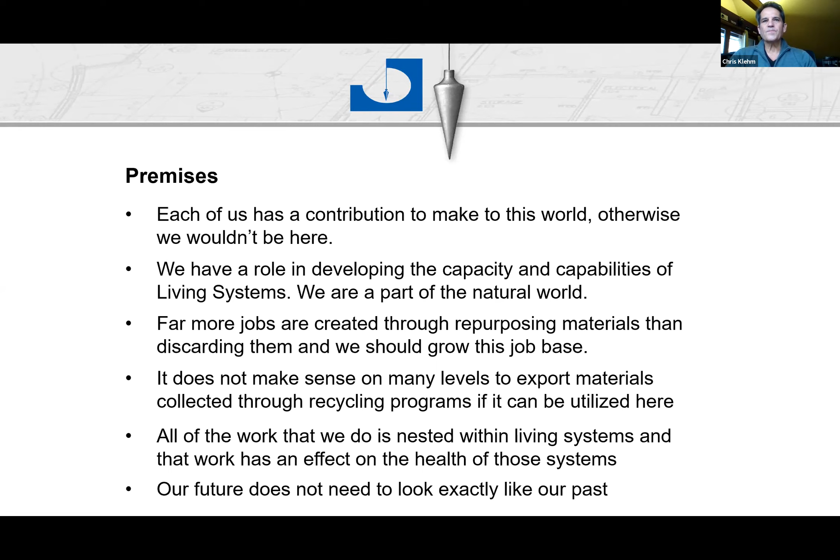Hello, I'm an outdoors person. Anybody that knows me knows I primarily spend my time outdoors - fly fishing, farming, hiking, camping, swimming, or doing work outside. I feel very connected to the land, especially the land that I live on and work. That connection has formed a great love, respect, and appreciation of the natural world.

My travels have taken me to beautiful and fragile places all over the world, mostly in pursuit of fly fishing, I have to admit. But I've seen firsthand how ecosystems work and the interdependence they have that makes up the workings of our natural world.

Lately, when I go to some of my favorite saltwater flats, I'm met with overwhelming amounts of debris, especially plastic debris. This debris has been blown there, dropped off a ship, or just not dealt with properly. When you really start to think about it, it's not having the will to address your responsibility for the waste that we create. We have this term that we throw things away - but where's away? Sometimes it's just due to not having an awareness as to the impact of what we have, because it seems to be so small, an innocent action or an inaction.

But let's look at the ways that we can begin to see paths to develop awareness and address this impact.

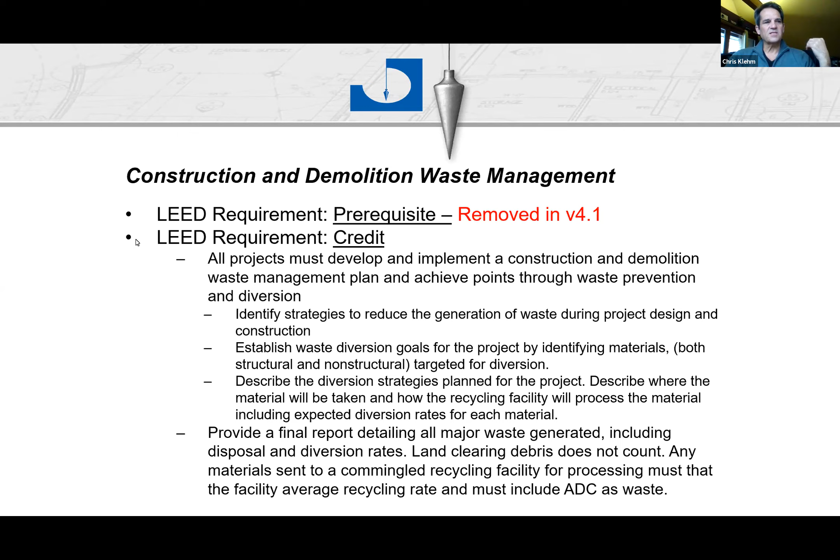So they've revised this credit now in v4.1, and that credit is we can get one point for diverting 50% of our waste. Or LEED is now focusing much more on waste prevention - what are ways that we can actually reduce the waste?

There are salvaging strategies. In the demolition phase, can we leave more in place? So now we're looking at how do we reduce the amount of waste.

There are two ways to get points here. One is, instead of taking 50% of the waste we generate and diverting it from the landfill, can we actually generate less waste - generating less than 15 pounds per square foot, or generating less than 10 pounds per square foot? And LEED allows an exemplary performance credit now: if we use a third-party verified commingled facility and reduce the waste down to 7.5 pounds per square foot, LEED will reward us an extra point for that.

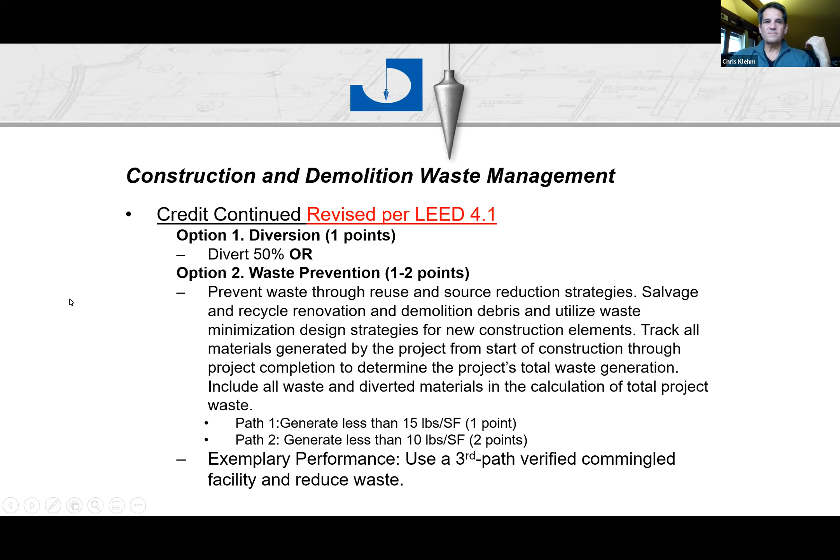So what's our responsibilities as contractors? In estimating, we need to account for how we're going to create a plan. What materials are we going to generate in demolition, and how are we going to address those, as well as those generated during construction. So from the outset, in the estimating phase, we need to think about how we're going to deal with this.

We're going to spend additional time during demolition, deconstruction. Is there going to be space on site for dumpsters? Are we going to have to address waste in ways that it's going to take it far off the site? Do we have to truck it somewhere far rather than locally? Can we donate to Construction Junction? Can we recycle the doors, calling somebody like Andrew Ellsworth?

In project management, we take and we detail that waste management plan even further. We look at how various waste streams are going to be tracked. Are we going to have separate dumpsters? Do we have enough room for this? Or do we have to commingle everything? But we begin to think about packaging. How are we going to buy things that we end up with much less packaging?

Locating the dumpsters is part of the site logistics plan. How are we going to get the reports? Are we only going to have one hauler, or are we going to have a variety of haulers?

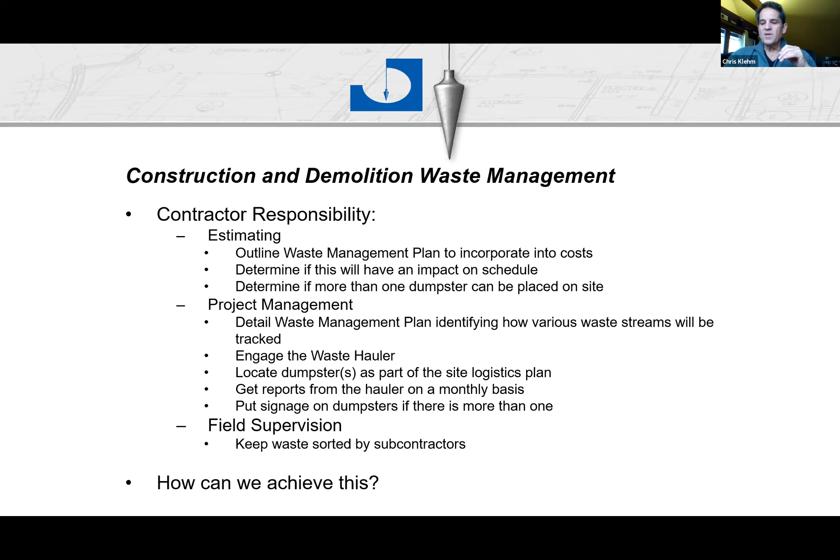And then in the field supervision, we have to look at signage on the dumpsters if we have more than one. And then making sure that the subcontractors are going to stay on top of this. So how are we going to achieve this?

Reduce, reuse, recycle. Starting there. Can we reuse it? Can we reduce it, then recycle it? So in recycling, really look at what we have in the waste management plan. Know the designated areas for recycling. Don't start with that 50% rate. Start with 100% diversion rate. Can you hit 100%? I've hit 98.7% is the best I've done on a project, but we went for 100%.

And don't look at it as trash. These are resources. This is material that can be reused, can be recycled. This could be feedstock for new material. Is there leftover building supplies? Can we reuse those? Can we donate those to somebody like Construction Junction? When we're doing temporary structures, what are ways that we can do these so that they can be disassembled and reused? Can we start to create modular construction for temporary structures or for forming that can be used over and over again?

Minimize the amount of paper drawings used at job sites. Everybody has iPads now. We can get those out into the field. And then avoiding contamination of the bins. We think about the perspective of the hauler. What is the best way we can give them that material so they can recycle more of it?

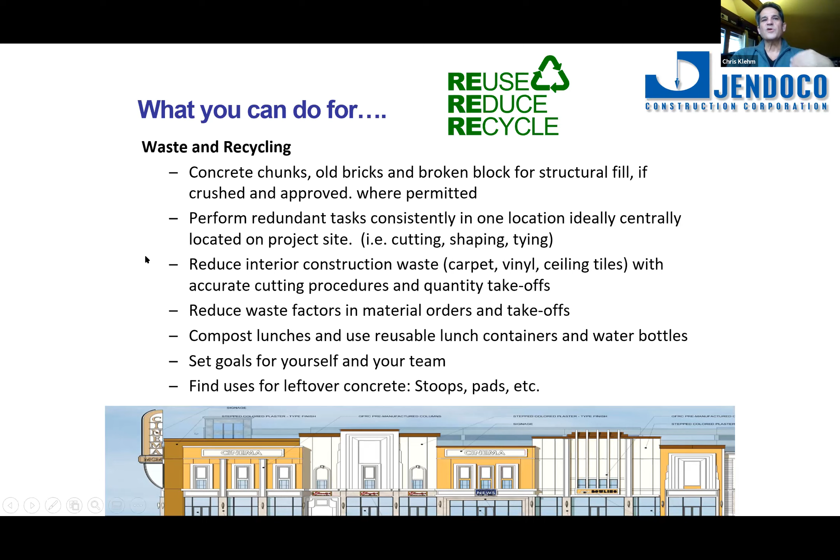So we go back to that reduce, reuse, recycle. Now, that's the foundation of waste management. So let's start to think about waste in terms of why is it bad. And we think, what's the first thing we can attack? Well, what are the materials that we're throwing away that have large amounts of embodied carbon in there? It takes a lot of carbon created during the fabrication process.

Cement is one of them. The manufacturing of Portland cement is the third greatest generation of carbon dioxide that we have. So if we reduce steel or reduce the amount of cement that we use in concrete, we're reducing that carbon. Reducing the amount of steel, wood versus steel. Wood is a renewable resource and actually sequesters carbon. Reduce the amount of items that we're importing.

If we're buying materials local, we're supporting a local economy, plus we're not getting into all those transportation costs and the carbon that we generate in trying to get materials to the project site.

Reduce the amount of waste that's generated through packaging. Can we start to minimize packaging? We did a project where all of the casework was delivered not in cartons, but in furniture blankets. Nothing was damaged. There was no packaging there.

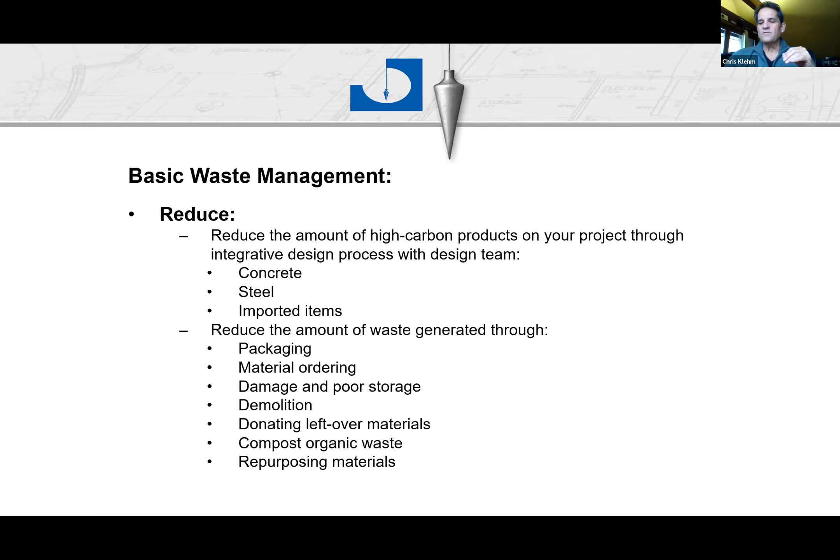Reuse. What are salvage opportunities? We salvage buildings in whole, and only take out the parts that are damaged. What are ways that we can improve the materials on site so they can be reused? How can those materials be used in a way that we hadn't thought of before? Reusing materials as a whole, upcycling them, and going out and purchasing reused materials.

Hear more about that a little later. How do we purchase reused materials? Next slide.

Separate materials as your feedstocks. Don't think about them as waste. With metal studs, get all those metal studs in the bins off the floor, so all that metal goes into a container. Again, I'm going to stress this again: separating that organic and wet materials. Make it easier to recycle than it is to throw away through bin placement, setting things up so it's more difficult to throw something away than it is to recycle it.

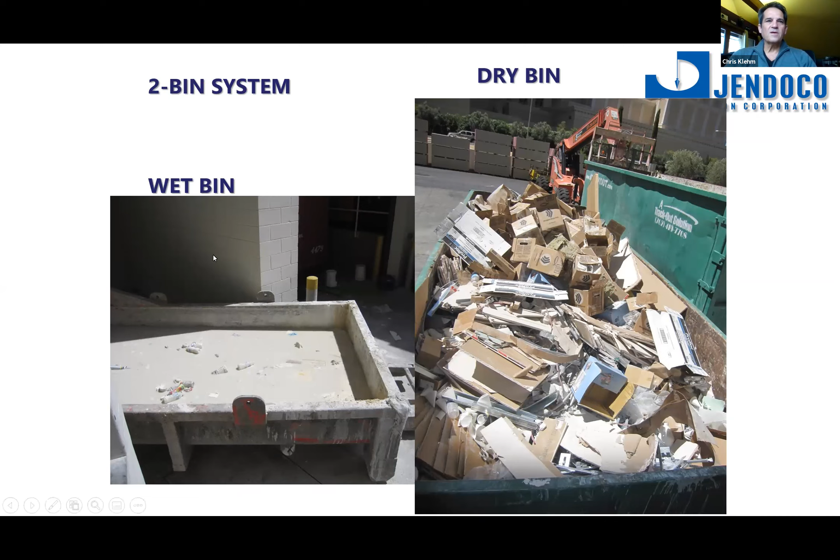Wet bin, next slide. Wet bin can be used for paints, drywall bucket cleanouts, sodas, drinks, water, oils. The dry bin's basically everything else. This way, we're not contaminating any of that material.

Food containers, put the food containers near where the lunchrooms are, or if you have a multi-story building where people eat lunch on each floor, put it in those lunch areas. An optional third bin is strictly for concrete cleanout. The concrete can dry up and then be crushed and recycled. So having a concrete cleanout bin is a great way to really reduce the amount of waste that we have.

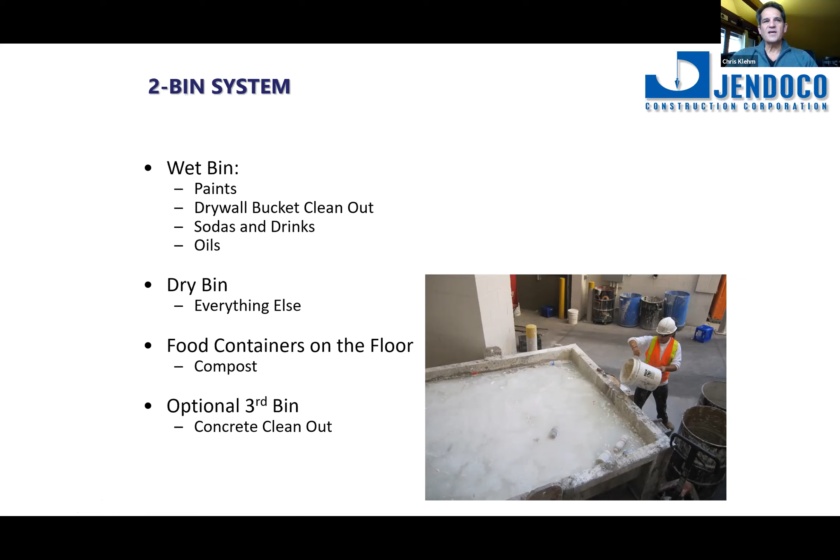Next slide. Best practices. A lot of us do design build work or negotiated work. Work with a design team for disassembly. What is the secondary use this building could have? Think about that, how can it be flexible? Particularly in interiors, how can we make interiors much, much more flexible?

Set those high targets for the project. Before you start demolition, what are ways that you can salvage and reuse materials? If you're taking off an addition, are there joists that can be reincorporated back into that project? Build time into the schedule for deconstruction.

Just as we get owners to purchase long lead time materials, think about deconstruction as a long lead time process, and let's get in there and get that process started as soon as possible. Work with your waste haulers.

Make sure you're doing everything you can to make their job easier and more effective. Salvage all those surplus materials. Look at ways you can reduce packaging on projects by accurately purchasing materials you need, doing on-site mixed concrete rather than trucked-in concrete. If you need 5.3 yards for a pour, they'll mix and pour 5.3 yards. You're only paying for 5.3 yards, not for concrete you're throwing away. The costs are competitive, and we're not creating waste.

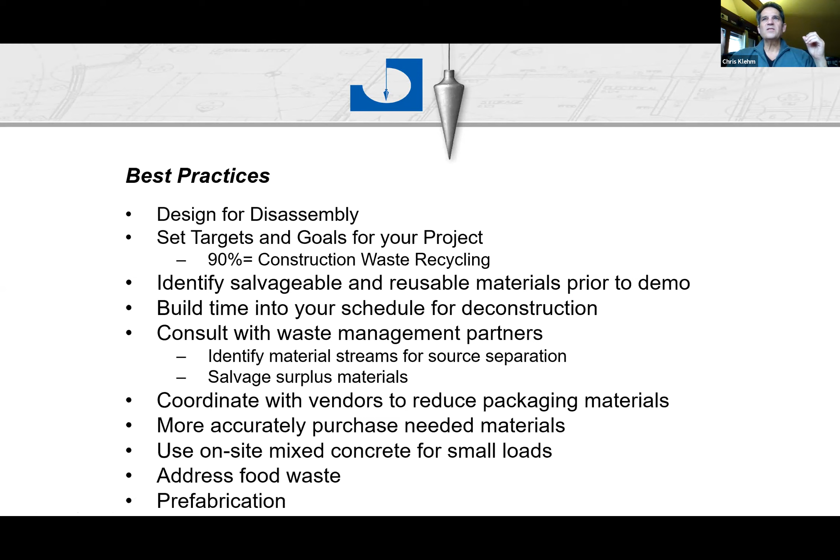Addressing food waste, prefabrication - we did the whole Tree Pittsburgh project as a modular building, and that reduced waste significantly on that project.

Landfills have huge impacts. 70% of the waste in landfills is construction and demolition waste. 25% is just from commercial interiors, which can be designed for all kinds of flexibility so we're not throwing things away. So we can have a huge impact.

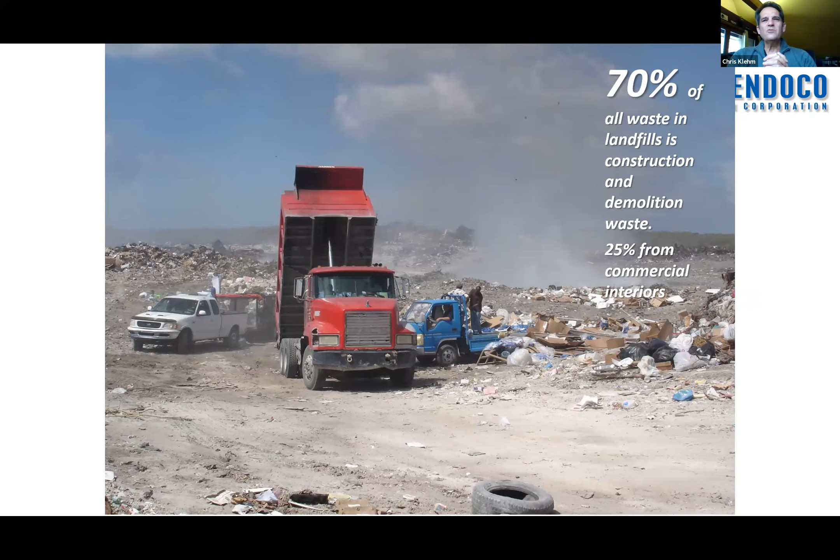Surface pollution isn't the only environmental impact - carbon emissions are another one. We release a lot more carbon when we extract and manufacture materials for construction than we do when we salvage buildings or materials and recycle them. We spend a lot more carbon on materials than we do in operations. 80% of the carbon in a building is embodied carbon from the extraction, manufacturing, and transportation of these materials.

Reducing the amount of each of these has a direct environmental impact - the less carbon we use, the less impact on climate we're going to have. We're also starting to look at the climate impacts of materials. Wood is a carbon sequestering material, while steel takes a lot of carbon and releases a lot of carbon into the atmosphere to manufacture. So wood studs versus metal studs - they're doing high-rise buildings now out of wood in a structural way. We need to understand that and work with our design teams to help bring down the environmental impact.

The impacts that waste has are varied and significant. Land excavated for waste disposal reduces tree cover for carbon sequestration. Methane released from landfills, unless captured and used on site, is released into the atmosphere. Transportation of construction waste means exhaust from trucks. We're essentially landfilling feedstock that could be used for manufacturing new materials, reducing the amount of carbon we have, and materials that could be repurposed in projects, helping other people buy them less expensively.

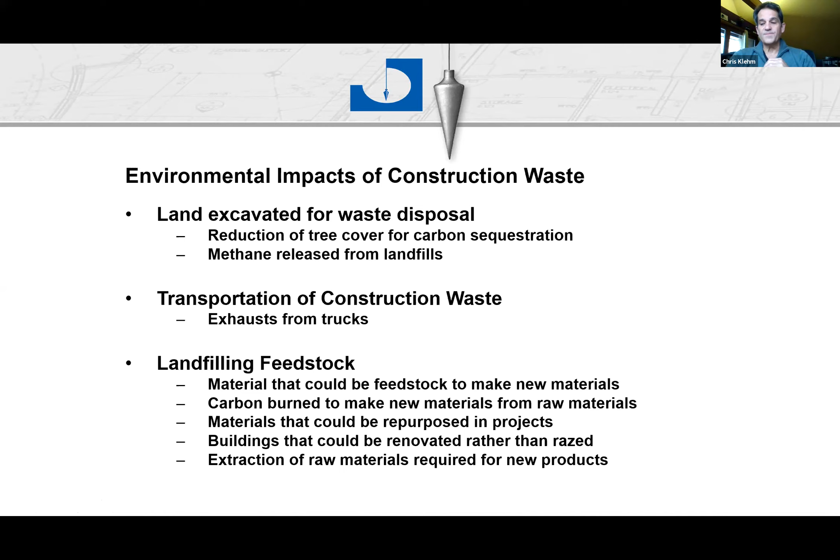When the USGBC surveyed people on what they mostly related to environmentally, only 11% associated green space with green building, with living a longer, happier, healthier life. Recycling was huge - that was one of the most related ways people looked at green buildings.

We've been guilty of thinking there's a technological solution to every perceived natural problem. We couldn't be more wrong. We know that life begets life; technology doesn't. So we need to align with and enhance existing natural systems to heal that damage we've done and let nature work again. Reducing carbon is a huge part of that.

So what's in the works? For drywall, which really began this whole conversation on waste management, there's a company far away in Denver, PA, but they will come and pick up your drywall and recycle it. Two companies we're going to hear about real soon are Construction Junction, with Mike Gable - it's a source of used building materials and a great place to send your excess building material.

Doors Unhinged, with Andrew Ellsworth - Andrew's created an amazing resource for quality commercial doors and hardware. He will take your doors off your site, and he will sell you doors. This way we're not cutting down new trees for doors, not having new aluminum and glass for doors. Andrew can solve that - we're going to hear more about Andrew on that.

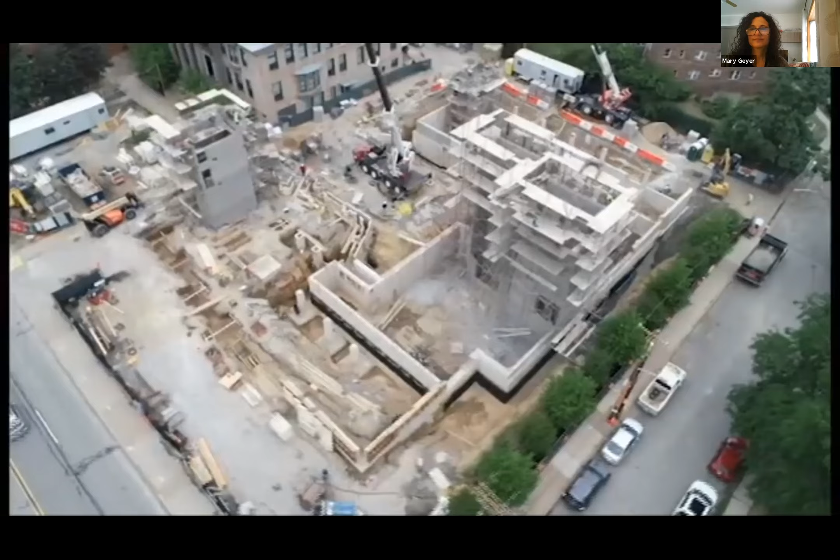Good morning, Pittsburgh Builders. This is Nathaniel Green on site at Carnegie Mellon University's Fifth and Clyde Residence Hall. This is a roughly 100,000 square foot project designed by LTO Architects out of New York City. Our local architect of record is PWWG. We're seeking LEED Gold certification for this project.

We have some lofty goals for recycling content. Under 4.0, we are expected to hit a 75% diversion rate. One of the strategies we've implemented is to segregate our food waste. Food waste is one of the biggest contaminators in a construction load. By implementing a separate 3-yard dumpster on site, we've been able to increase our yield of construction commingled loads by roughly 12 to 15%, which puts us solidly within our target goals for LEED 4.0.

The idea behind this is that contaminated loads - open coffee cups, drinks, spilling, food waste from lunch - gets on recycled content, and it doesn't get accepted at the recycling facility. So by keeping these in a separate container, we're able to increase our yield and have a better outcome for the project.

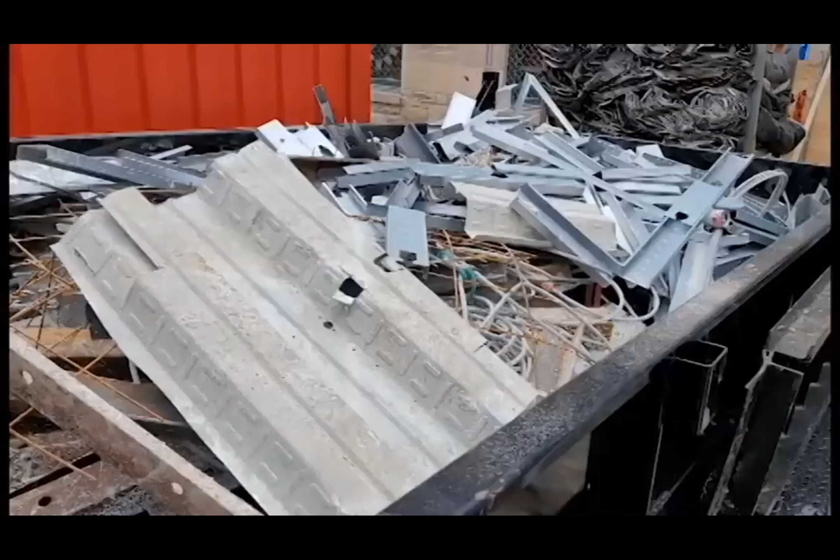Another thing we were able to do - this is ground-up construction, so we didn't have a lot of waste early on in the project. We were able to recycle our site lighting and re-implement that into the landscaping plan. We've also been able to scrap a good amount of metal, and we use the funds from the scrap metal to keep employee morale up and get subcontractor buy-in to our food waste diversion plan.

So by buying lunch periodically, we're able to keep guys happy and people are recycling more, which is great for the project. Thanks for your time and good luck on your projects.

Thanks for the great video, Nate and Mary. That was a great talk.

Next up, I'm really excited to hear from Eamon and 3R Sustainability. They're a LEED reviewer, and so those of us as contractors make our submissions. The documentation is a big part of what we contribute to the project. Now we're going to hear about how we can do the documentation better. So thanks for talking today, Eamon.

Great, thank you so much for having me. It's really nice to talk to everybody. I've worked with a lot of you folks in the last decade and a half in Pittsburgh, so I appreciate the opportunity to get to talk to everyone.

So 3R is a consultant in the Strip District. We're right above Wigle Whiskey - if anyone's familiar with the Strip District, we're on the 3rd floor. We are a LEED project reviewer, so there's about a dozen of us. We spend about half our time actually reviewing, on average, probably 500 to 600 LEED projects internationally throughout the year. So when they say the third-party review, we are one of about 7 teams that do that third-party review. So there's a good chance that we've reviewed your project.

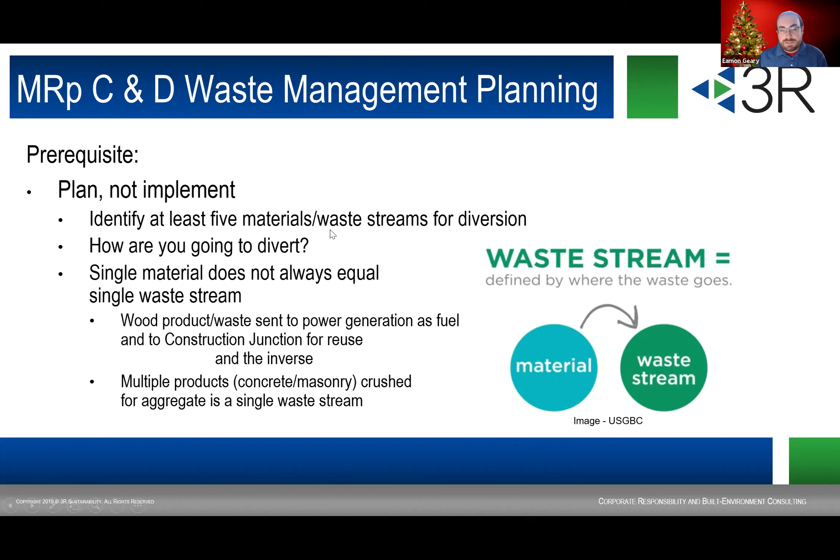I wanted to pull together some tips—these are the do's and don'ts. I'll leave them on the screen and look at my notes, because it's easier for me to write stuff like this down when we're getting technical. So what we're looking for in these credits is to make sure you don't have any inappropriate materials.

That's going to be hazardous waste, excavated soils, land clearing debris. I know we talked about alternative daily cover—those all need to be noted in your plan but kept out of your calculations. We want to see that you're looking at them and acknowledging them and diverting them or treating them as they should be, but keeping them out of your actual calculations, because you can't recycle hazardous materials—you can only remediate stuff like that.

The other item is not having 5 streams. I know it sounds silly since it's one of the requirements, but a lot of projects get pended mostly because they just don't have 5 streams. Another thing I didn't know, but now that I think about it—when you have commingled materials, that only counts as one waste stream because everything is together. So you can have 100 different products all commingled, and that only counts as one waste stream.

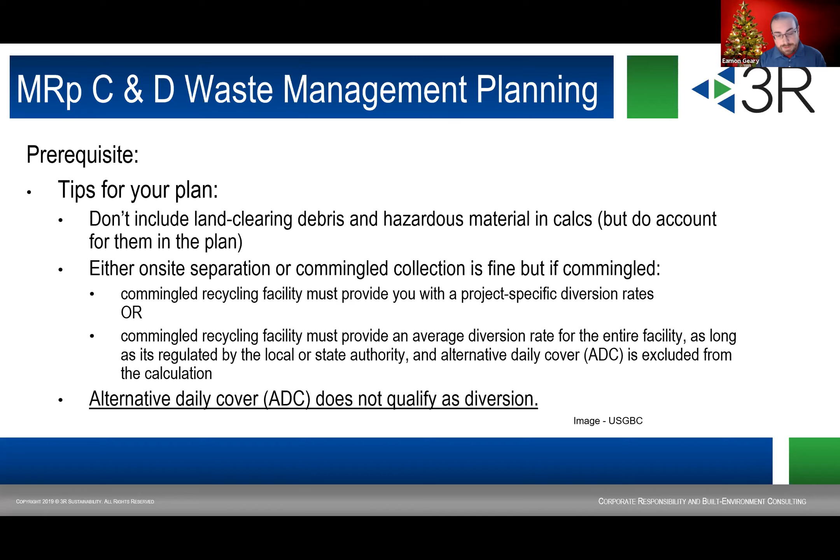The other item we see a lot is donations. So Andrew's great organization that he does with the doors—that's a donation, and you need to evaluate and track that as well.

Getting into the actual credit, option 1 has, here's the funny part. With 4.1, in some ways they made it easier, in some ways they made it more difficult. In version 4, option 1 can give you up to 2 points.

If you do 50% with 3 streams, you get a point. If you do 75% with 4 streams, you get 2 points. In version 4.1, there's only 1 point allowed for this option.

When you look at version 4.1, any project can take these substitutions, but you need to think, is this best for my project? In some cases, especially in the building materials and EPD and BPDO credits, it's an easy substitution, they're just requiring less materials. For this one, you do want to think, is option 1 best for my project, and if so, do I want to get that extra point?

So we stick with version 4. But option 2 is absolutely better in terms of version 4.1. It went from needing to reduce your total waste material to 2.5 pounds per square foot of building floor area, which is very, very difficult. I just looked at my count yesterday, and I was at 150 projects reviewed this year, and I haven't seen that once. That's almost an impossible threshold to hit. It was pie in the sky, I think.

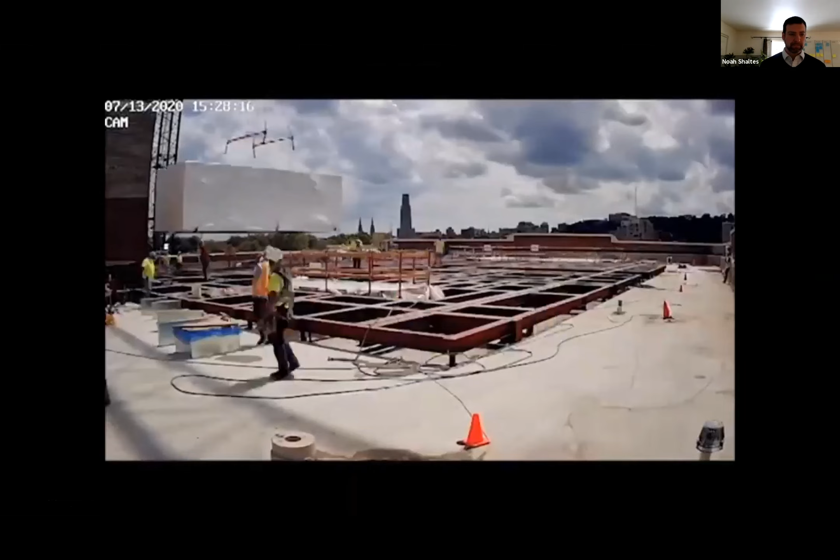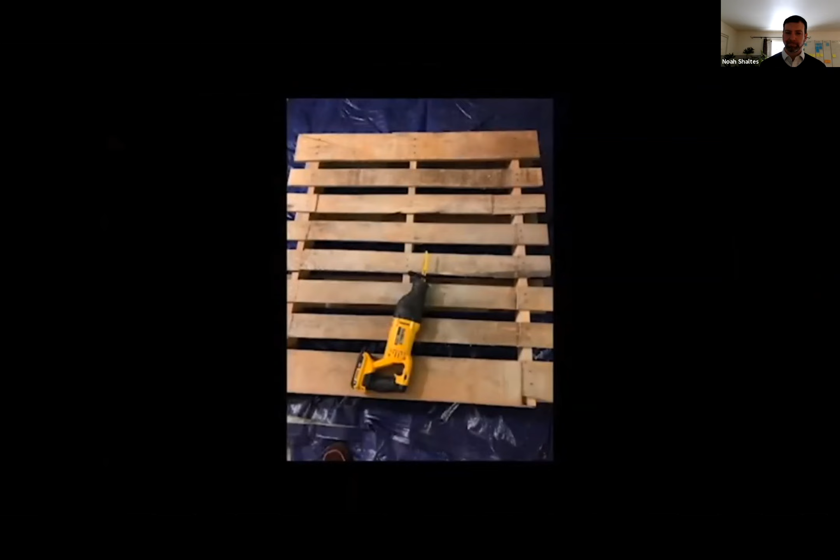Here in Pittsburgh at the 5051 Centre Avenue project, the Turner team utilized a prefabricated penthouse to reduce the amount of construction waste it would have taken to construct the penthouse on site. The masonry contractor on the project is reusing the wood pallets that other contractors have left behind after bringing their materials to site. This has reduced the amount of pallets thrown into the dumpsters. Even our own Turner employees have turned to making crafts from the unsalvageable pallets.

At the University of Pittsburgh BST3 project, the Turner team has salvaged office furniture and worked with local companies such as Construction Junction to provide a new use for the reclaimed items.

At MSA, the Turner team has made a team effort to recycle their own personal items, from water bottles to utensils, and take them to the local recycling center.

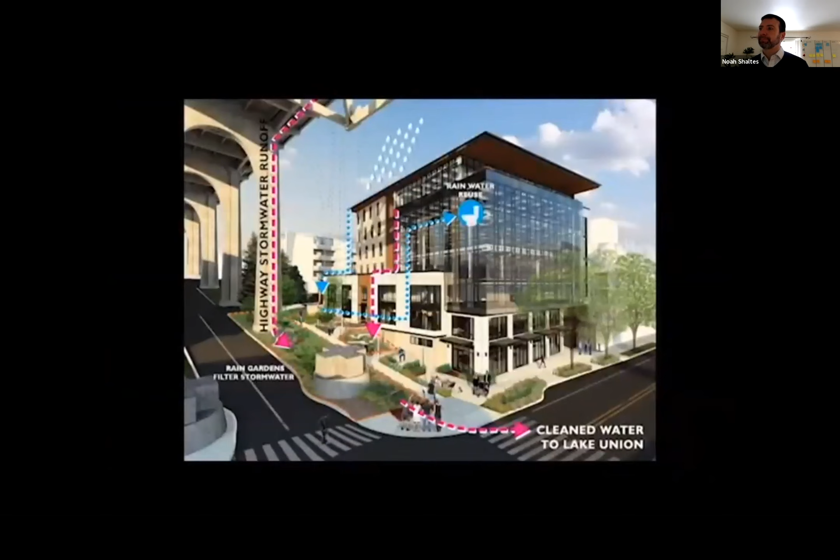The Turner construction team out in Seattle worked on the Watershed Office project, which also happened to be a Living Building Challenge. One of the requirements of the Living Building Challenge is the need to salvage one material per every 500 square meters of gross building area. Due to the size of the project, that meant 14 materials had to be salvaged and reused.

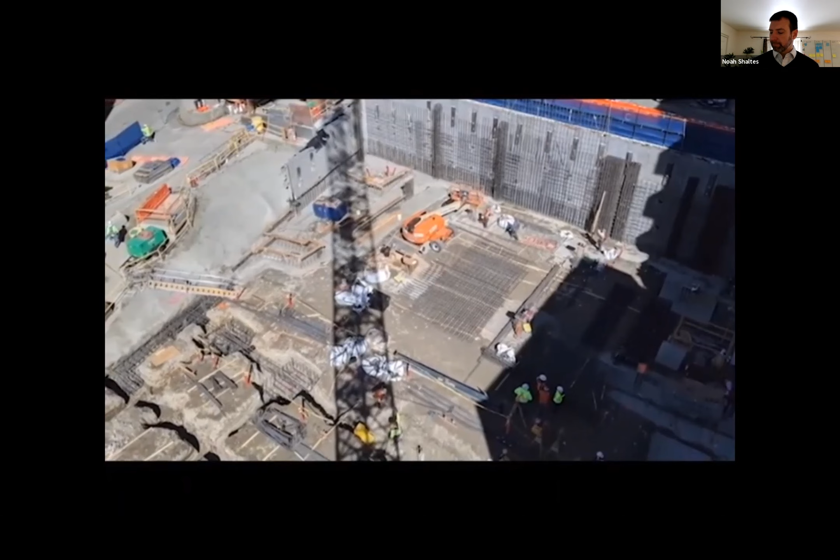This included items such as rough sawn wood used for concrete pours turned into decorative walls at the entry of the building, utilizing existing foundation walls to eliminate approximately 100 tons of concrete waste that would have been generated if new foundation walls were poured, and reusing existing pendant lights from the original building, just to name a few.